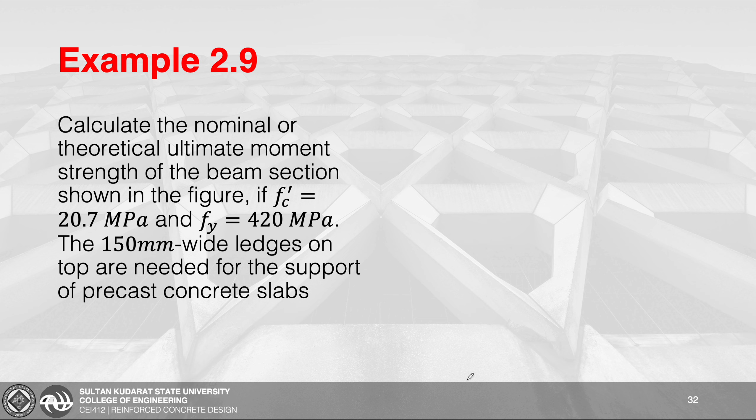So example 2.9, calculate the nominal or theoretical na ultimate moment strength of the beam section shown in the figure, if yung f'c natin is 20.7 megapascal, yung Fy is 420 megapascal. The 150 mm wide ledges on the top are needed for the support of precast concrete slabs.

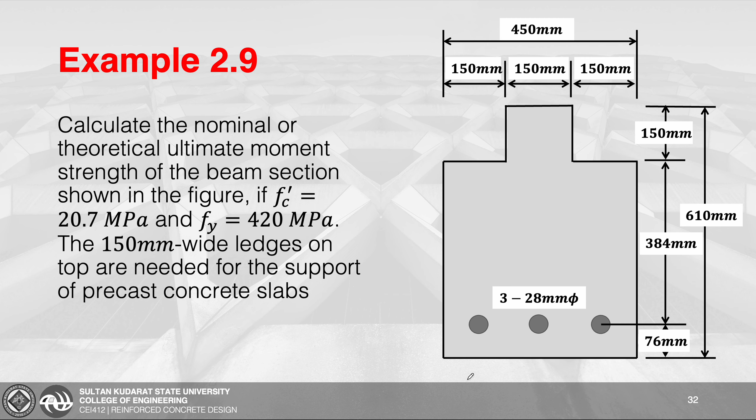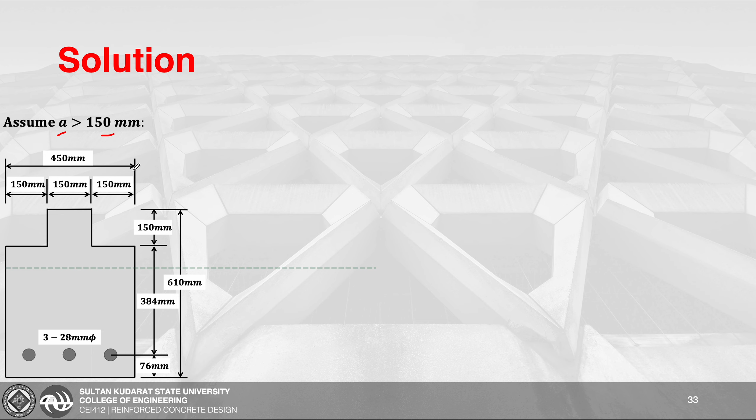Ito yung solution. First, we're going to assume na yung depth ng ating compression block is greater sa 150 millimeters. So, yung green na to, ito yung projected na location ng depth ng ating compression block. And because of that, ito na ngayon yung mga area ng ating compression block. Since irregular yung section, it will be divided into basic shapes. So, itong green tsaka itong kulay blue na mga regions composes the area ng ating compression block.

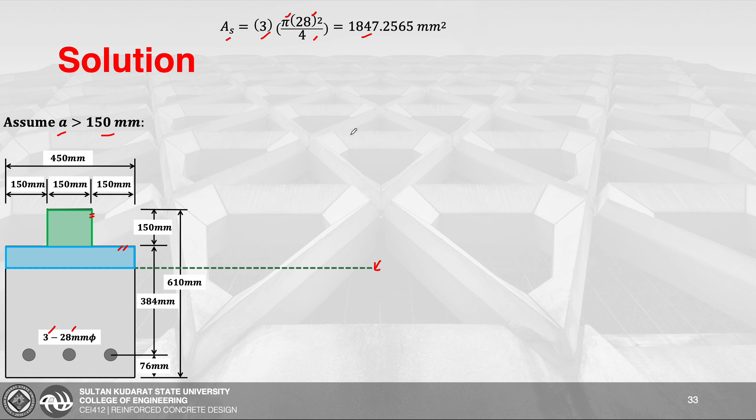So, first, isolve muna natin yung total area ng ating steel. Meron tayong tatlong 28 mm diameter na rebar. So, 3 times pi d squared all over 4, we'll get 1,847.2565 square millimeters. After that, isosolve natin yung area ng compression block by making use of the equilibrium of forces. So, yung mga tensile forces from our steel reinforcement, equate natin sa compressive force ng ating compression block.

So, yung ating tensile force from our steel reinforcement, considering na mag-yield yung mga steel reinforcement natin, is equivalent to As times your Fy. And yung C naman natin is 0.85 f'c Ac. Now, take note, yung susolve natin dito is yung area ng compression block.

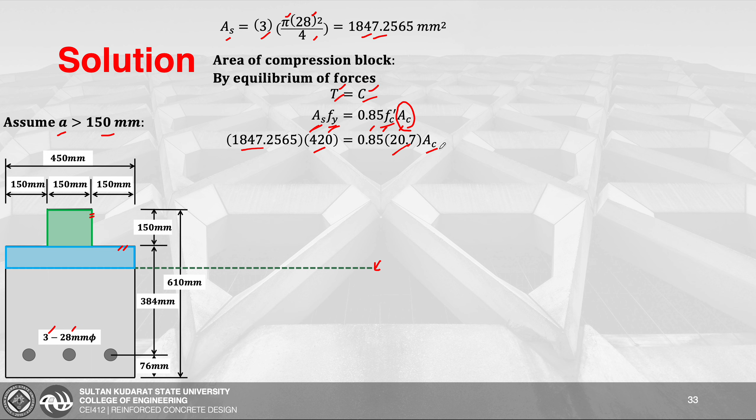So, yung As is equivalent to 1847, tsaka yung Fy, based sa problem, is 420, tsaka yung f'c natin is 20.7. So, yung masasolve natin na value ng Ac natin is 44,094.7843 square millimeters. After that, isosolve naman natin yung Y1 tsaka Y2 because these are required para ma-determine natin yung centroid ng ating compression block since irregular yung shape nito, gamit yung Varignon's theorem.

So, yung centroid of the compression block gamit yung Varignon's theorem is just equivalent to the summation of Ai Yi all over A sub T. So, the question here is how many areas do we have sa ating compression block? Meron tayong green na region tsaka itong blue na region. So, dalawa. Itong area ng green na region will be represented by A1, tsaka yung area ng blue na region will be represented by A sub 2. Tsaka yung total area will be equivalent to the area ng ating compression block.

So, yung area 1 natin is equivalent to 150 by 150. Tsaka yung centroid naman, yung Y1, papunta doon sa extreme fiber ng ating concrete should be taken as 150 divided by 2. So, we'll get 75 millimeters. After that is yung area 2. However, hindi natin basta-basta masosolve yung area nitong blue na region kasi wala pa tayong dimension nito. Let's say, gawin ko na lang tong A sub 2.

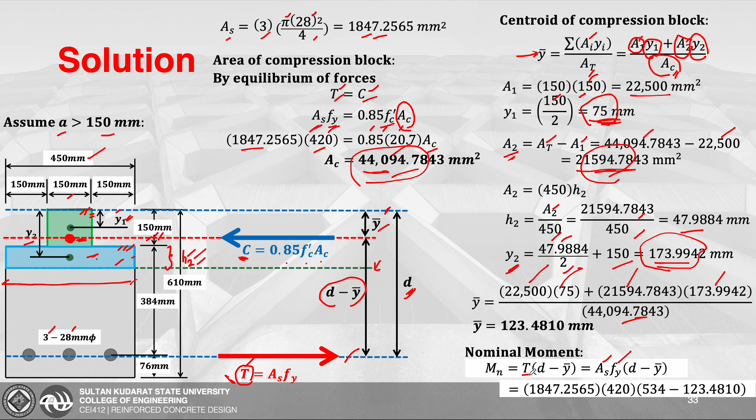So, yung T natin is AS times Fy. So, by direct substitution, yung AS is taken to be 1,847. Yung Fy naman natin, given sa problem na 420. Yung D natin, kung i-add natin tong 384 tsaka 150, this is equivalent to our D na 534, minus yung ating bar Y. Yung bar Y natin is itong 123.4810. Then, yung answer dito, i-divide lang natin ng 10 to the power of 6 para ma-convert siya from Newton millimeters to kilonewton meter. We'll get a value of

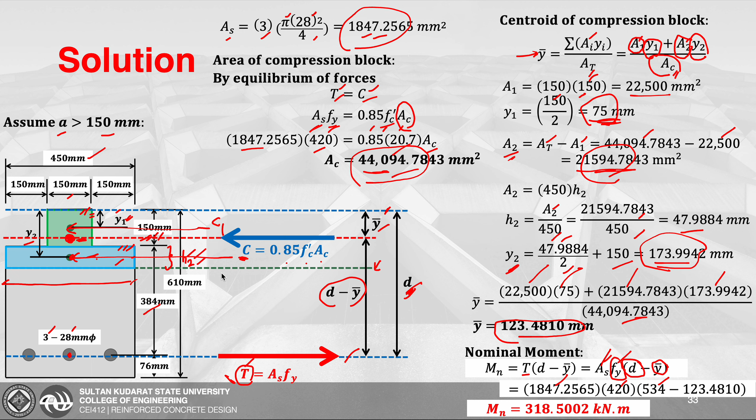318.5002 kilonewton meters. Now, pwede rin nating ma-check if we're going to sum up our moments naman about the centroid ng ating steel reinforcement. So, kumbaga, isa-isahin lang natin, dito meron tayong C1, tsaka dito naman meron tayong C2. So, counter check natin. If we're going to sum up our moments sa centroid naman ng ating steel reinforcement. So, yung C1 natin, this is now equivalent to 0.85

times f'c. Yung f'c natin is 20.7. 0.85 f'c times yung area. Yung area nitong green is 150 by 150. And then, yung moment arm naman nito papunta dito sa centroid is D minus Y1. So, D natin is 534 minus yung Y1. Yung Y1 natin is, I think, 75.

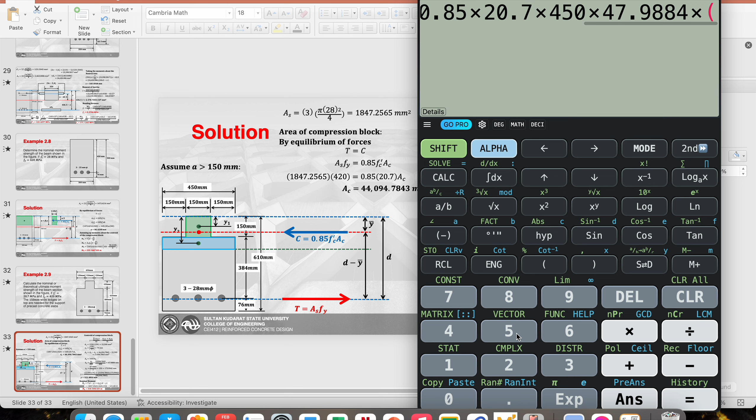Plus yung C2. Yung C2 naman natin, itong compressive force dito sa blue na region. So, same pa rin, 0.85 times FC prime na 20.7 times yung area nito, which is 450 by yung H2 natin kanina, which is 47.9884, times yung moment arm naman nito na D minus Y sub 2. So yung D natin is 534 minus yung Y2 which is 173.9942.

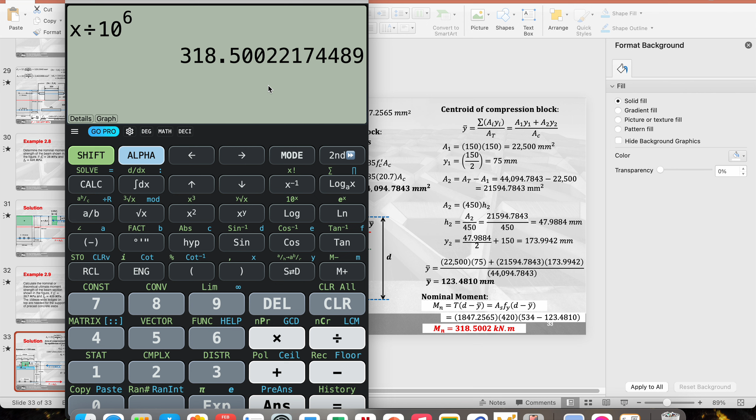So yung answer nito is itong value. Save natin sa x. So yung x, i-divide natin ng 10 to the power of 6. So we'll get a value of 318.5002. So this verifies na yung nominal moment natin about the centroid ng ating compression block is also equivalent to 318.5002 kilonewton meters.